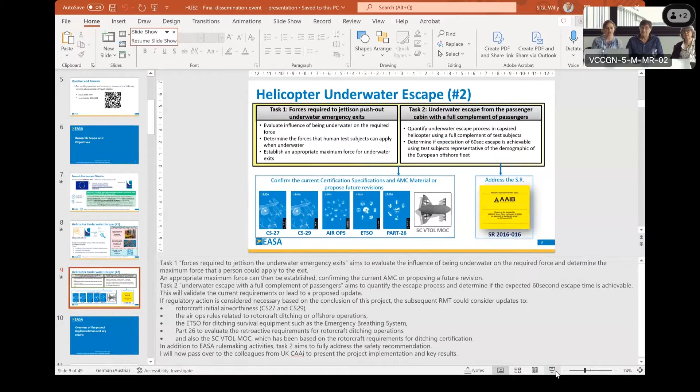The objective of this research was to carry out an initial review into the nature of the research that could be envisaged to answer this safety recommendation. So the first task of this project was to perform an analysis of the currently available information.

The shortfalls in this data were then identified and future research activities proposed to address these shortfalls. The initial research project identified 3 high potential safety benefit future projects.

The first one was an investigation into the forces required to jettison push-out underwater emergency exits. The second one was underwater escape from the cabin with a full complement of passengers. And thirdly, passenger training and fidelity.

Of these 3 potential projects, 2 were selected to be investigated further by this research project, the helicopter underwater escape number 2.

So the first task, forces required to jettison the underwater emergency exits, aims to evaluate the influence of being underwater on the required force and determine the maximum force that a person could apply to the exit. An appropriate maximum force can then be established, confirming the current AMC or proposing a future revision.

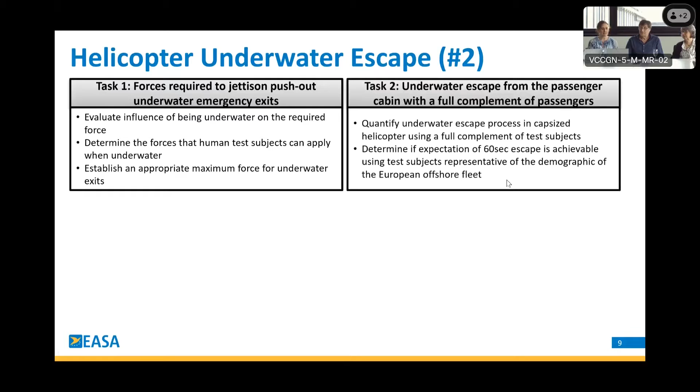Task 2, underwater escape with a full complement of passengers, aims to quantify the escape process and determine if the expected 60-second escape time is achievable. This will validate the current requirements or lead to a proposed update.

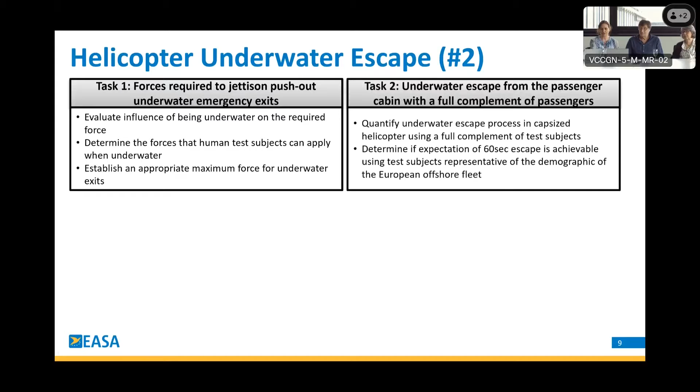If regulatory action is considered necessary based on the conclusions of this project, the subsequent rulemaking task could consider updates to rotorcraft initial airworthiness, so CS27 and CS29, the AirOps rules related to rotorcraft ditching or offshore operations, the ETSO for ditching survival equipment, such as the emergency breathing system, Part 26 to evaluate the retroactive requirements for rotorcraft ditching operations, and also the SC VTOL MOC, which has been based on the rotorcraft requirements for ditching certification.

In addition to the EASA rulemaking activities, Task 2 aims to fully address the safety recommendation.

I'll now pass over to the colleagues from UKCAA International to present the project implementation and key results.

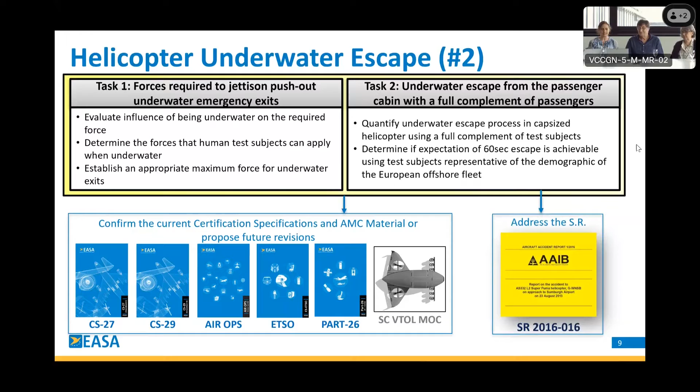Good afternoon, everybody. The trials performed for the project were carried out at the helicopter underwater escape training facilities of Blackpool and The Fylde College at their Fleetwood Nautical Campus.

The trials were run by the staff of the Fleetwood Test House, and the helicopter simulator was operated by the training staff of the Fleetwood Offshore Survival Centre, who also supplied the safety personnel and divers. The environmental training tank in the photo on the left consists of a 4-metre deep pool with an adjustable shallow water platform.

We will now play a short video clip to give you an appreciation of how the simulator operates.

The helicopter underwater escape training simulator, or HUETS, that you can see in the photos is normally configured with 2 large doors at the front of the passenger cabin and 4 underwater emergency exits.

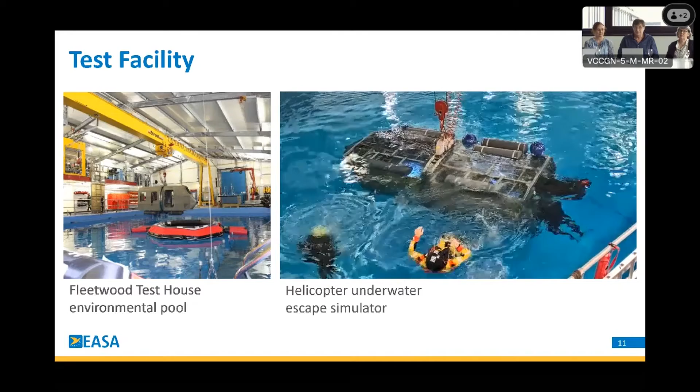The normal seating arrangement is 2 rows of 3 seats arranged in a 2+1 configuration, with a third row of a single seat, plus 2 seats in the front cockpit compartment representing flight crew seats.

The high back seats are fitted with 4-point harnesses and can be moved to accommodate different seating configurations. The right-hand photo shows a 4 abreast configuration used during the trials, with one of the seats in the stroke position.

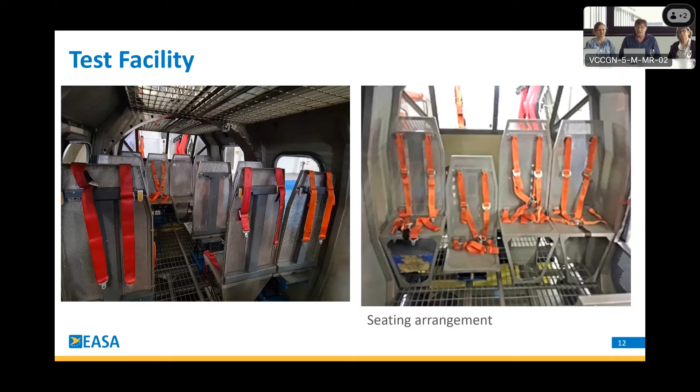The back of the cabin is open to allow access and to permit the HUET instructor and safety divers to observe the test subjects inside the HUETS.

A pool of 18 test subjects was recruited by the Fleetwood Test House, selected to be representative of the offshore workforce. The size categories defined in the new survival equipment standards were used to classify the test subjects, and at least 2 subjects for each of the 9 size categories were selected.

At least 2 subjects had a shoulder width measurement greater than 500 millimetres, which equates to the UK North Sea Extra Broad, or XBR, classification. There were also a range of ages and a mix of males and females.

All test subjects wore a helicopter immersion suit with a thermal liner and a helicopter constant wear life jacket, both similar to the equipment used by members of the UK offshore workforce when flying offshore. The survival equipment was worn over standard clothing, and the life jacket was fitted with an approved Category A compressed air emergency breathing system.

Full risk assessments were undertaken before conducting the trials, and ethical approval was provided by the Blackpool and The Fylde College Ethics Committee, based on the risks identified.

All test subjects were given information on the purpose of the trials, what they would be expected to do, and their right to withdraw at any time.

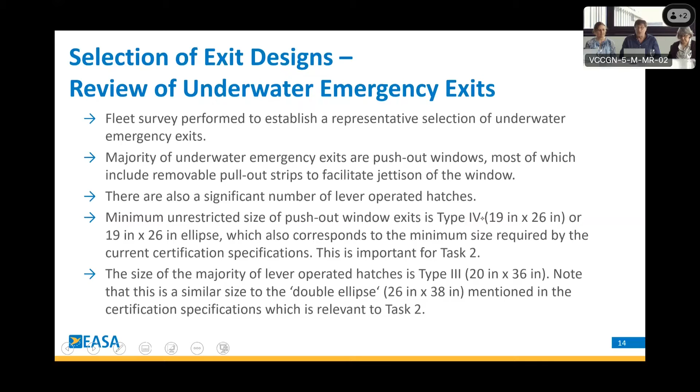The certification specifications also allow the use of an exit large enough to permit the simultaneous escape of 2 passengers side by side, which, in theory, would require an opening of 26 by 38 inches. Advantage was taken of the opportunity to evaluate these exits and also to assess whether the orientation of the exit is important, that is, landscape or portrait.

At 20 by 36 inches, the Type 3 exit is not quite as large as the double ellipse specified in the certification specifications, but it was considered of value to assess whether this standard exit would be large enough to permit the simultaneous escape of 2 passengers.

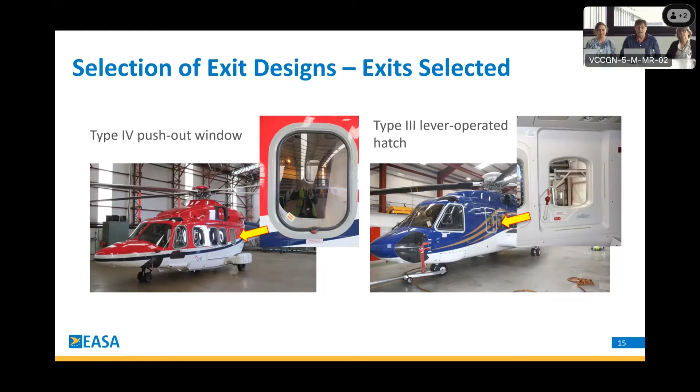The 4 standard exits in the HUET are Type 4 size, and it was only necessary to replace them with new exits fitted with adjustable spring ball detents so that the jettison force could be varied. An example is shown viewed from both inside and outside the HUET in the photos.

A special adapter plate was also manufactured to enable an actual AW189 rear passenger exit to be fitted to the HUET to enable comparison between the simulated exit and a real aircraft exit. This was to confirm that the behaviour of the simulated exit and a real exit secured by ball detents was sufficiently representative of a real exit fitted with a rubber seal.

It's not practical to produce a variable force rubber seal. The comparison was performed by 3 test subjects separate to the main pool of 18 in order to avoid any practice effect on the main trials.

The 3 operating techniques of hand push, hand strike and elbow strike were evaluated for 4 points of force application on the exit. These were the lower corner, halfway along the short side, halfway along the long side, and in the middle of the exit.

The trials were performed with the seat at normal height and then repeated with the seat fully stroked. The force applied was measured using a load cell for the purposes of the comparison. The operating force of the simulated exit was adjusted to match the aircraft exit for a hand push at the lower corner.

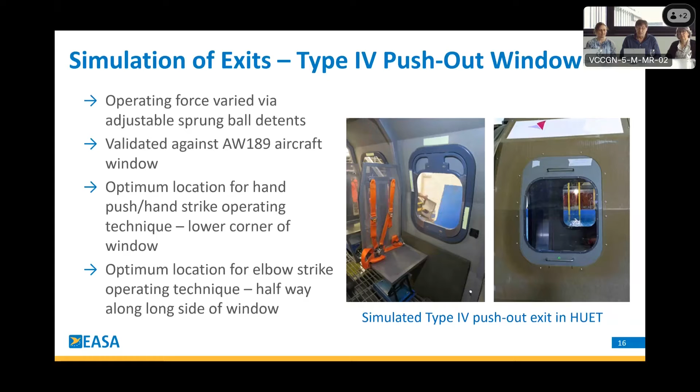The comparison confirmed similar behaviour of the real and simulated exits. In particular, for both exits, the optimum point of application of force for the hand push and hand strike techniques was found to be the lower corner of the exit. For the elbow strike technique, it was the middle of the long side of the exit. The middle of the exit required the largest operating force in both cases.

The simulated Type 3 lever-operated exit was fitted to the port side front door frame using a special adapter plate as shown in the left and middle photos. The operating force was adjusted by varying the torque loading on the lever spindle, which in turn varied the friction and hence the operating force. Comparison with a real aircraft exit was not considered to be necessary.

The starboard door frame was fitted with baffle plates to present a 26 by 38 inch large exit in portrait orientation for use during Task 2. This exit utilised the normal HUET operating lever located at the top of the door.

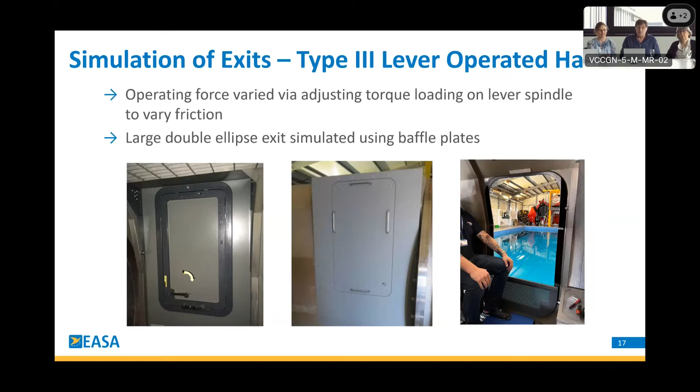And now on to Task 1.

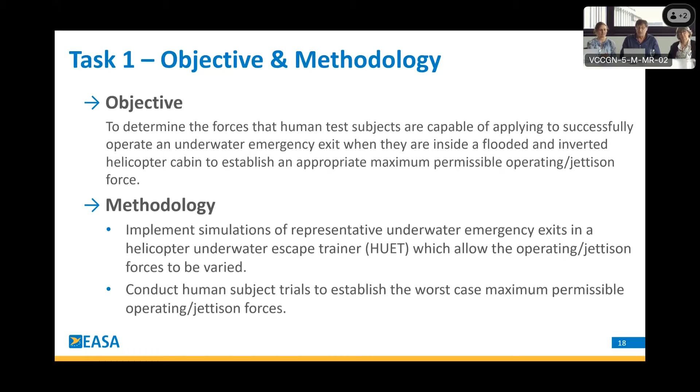As Emily mentioned earlier, the overall aim of Task 1 was to establish the forces that human test subjects are capable of applying to operate underwater emergency exits when they are inside a flooded and inverted helicopter cabin. The data generated by the trials can then be used to establish an appropriate maximum permissible operating force for comparison with the certification specifications. The methodology employed was to implement simulations of representative underwater emergency exits in a HUET in a way that allowed the operating forces to be varied and then perform human subject trials to establish the worst case maximum permissible operating forces.

The testing of the Type 4 push-out window exit commenced with dry trials and employed all 18 test subjects. The maximum operating force for each test subject was determined with the seat in the normal and stroke positions, using the corresponding optimum point of force application previously established for each of the 3 operating techniques.

The wet trials were performed with the seat in the worst case position as determined during the dry trials, which was the stroke position.

All 3 operating techniques were assessed by 9 of the test subjects, 1 from each of the 9 size weight classes. Each technique was performed with both the left and right hand or elbow.

Each wet trial was performed with the underwater escape trainer fully submerged but not inverted. Compressed air EBS was used by the test subjects during these trials, which was deployed prior to submersion.

For each test point, the operation of the exit was undertaken with the test subject in each of 3 starting positions, representing the possible scenarios that might occur in a real underwater escape. These were: seated next to the exit, floating in the cabin with the use of a handhold on the cabin wall next to the exit, and floating in the cabin without a handhold.

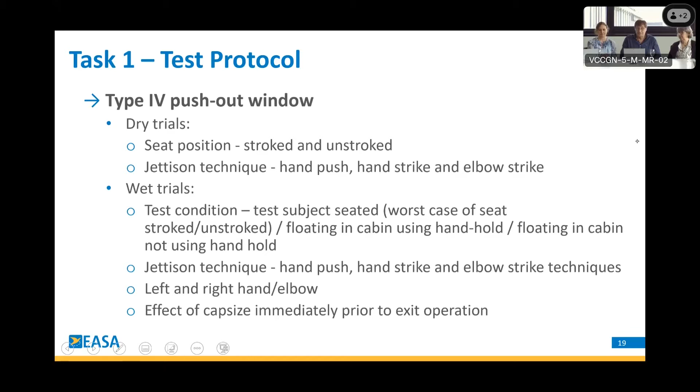As for the Type 4 push-out window, the testing of the Type 3 lever-operated hatch commenced with dry trials and employed the same test protocol, except that there was only one operating technique to evaluate. The wet trials also followed the same protocol, except that the effect of gloves was also evaluated.

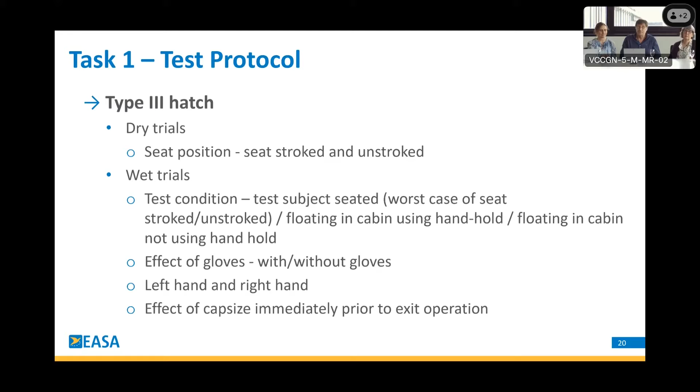There are some general points regarding the test protocol for both exits worth a mention. Firstly, the dry trials were started at the FAA AC operating force of 55 pounds and were reduced in approximately 5 pound increments until all test subjects were able to operate the exit.

If all the test subjects were able to operate the exit at 55 pounds, the operating force was increased instead of reduced.

Secondly, the wet trials were started at the lowest maximum operating force established during the dry trials, in the expectation that exit operation would be more difficult in the wet condition.

Third, during both the dry and wet trials, test subjects that had already successfully operated the exit were not required to repeat the test at lower operating forces. This was simply to save time.

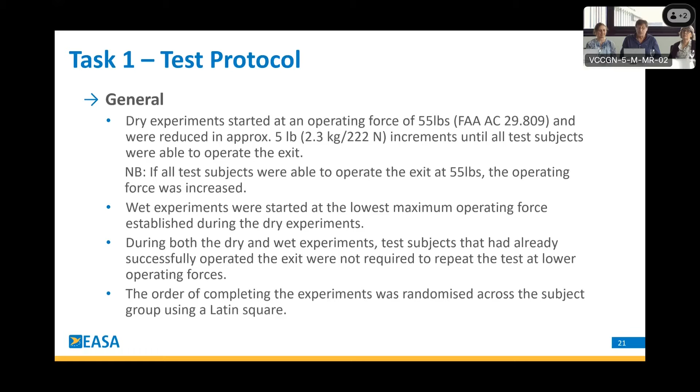And finally, the sequence of completing the trials was randomised across the subject group using a Latin square to avoid any order effects.

As you can imagine, with 18 test subjects and a number of permutations of variables such as seat position, left hand, right hand, and jettison technique, there are hundreds of results. But the results of most interest are the worst case or lowest forces measured, as it is these that represent the limit of what occupants can be expected to cope with in an emergency.

In terms of the overall results then, for the Type 4 push-out window, the worst case was found to be under wet conditions, seated with the seat in the stroked position and with the exit to the right of the test subject. For the Type 3 lever-operated hatch, the worst cases were found to be under wet conditions in the two starting positions of, firstly, seated with the seat in the stroke position and with the exit to the left, and secondly, free floating in the cabin.

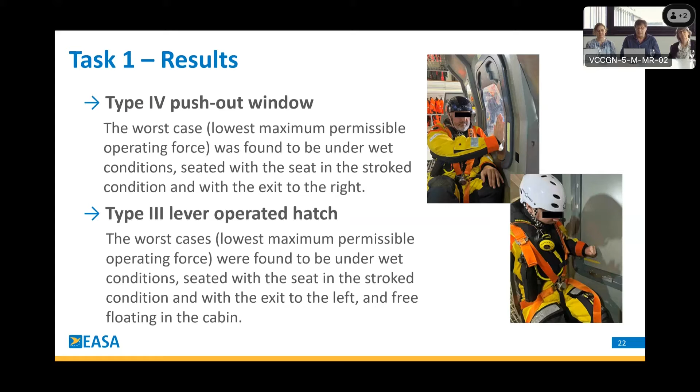Note that all of these forces, except for the elbow strike on the push-out window, are lower than the FAA AC figure of 55 pounds.

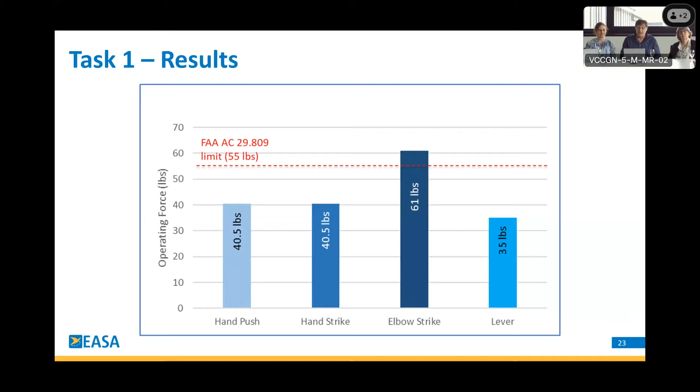Some general findings of interest were that gloves didn't have any significant effect. They were only evaluated for the lever-operated hatch, but this was because they were not expected to make any difference when operating the push-out window.

Secondly, handholds were very useful for operating the push-out window when free-floating in the cabin, but made no difference with the lever-operated hatch. Third, the addition of the capsize didn't have any effect on the operation of either exit.

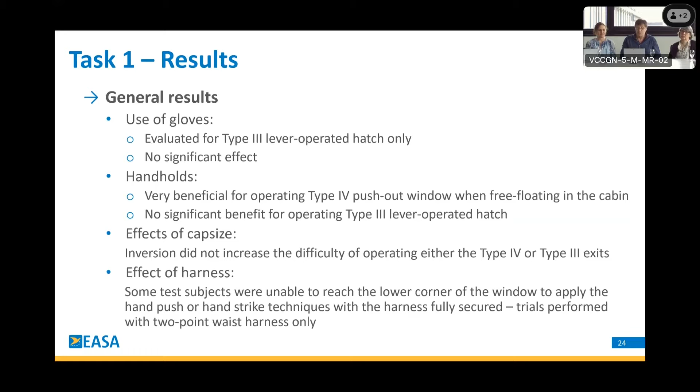Finally, some test subjects couldn't reach the lower corner of the window with the 4-point harness fully secured. This is important as it is standard practice to open the exit before releasing the seat harness. For the purposes of the trial, a 2-point waist harness only was worn by all test subjects.

Turning now to the application of the results for the push-out windows, the lowest maximum permissible operating force of 40.5 pounds using the hand push and hand strike techniques was lower than the limit defined in the FAA AC, currently applied by CS 27/29. However, the lowest maximum permissible operating force for the elbow strike technique of 61 pounds was greater than the FAA AC load limit. So either the force limits in CS 27/29 should be lowered for certification testing, or if the current force limits are retained, passengers should be briefed to use the elbow strike technique to operate the exit.

Because of the dynamic loading situation, the operating forces measured for the hand and elbow strike techniques were highly variable. The static loading of the steady hand push technique was more repeatable, produced more consistent results, and should therefore be used for certification testing.

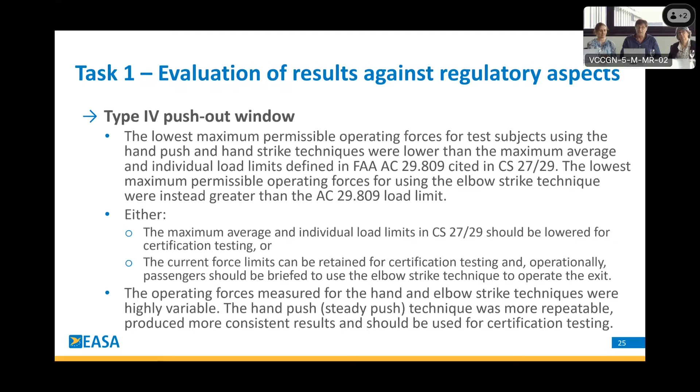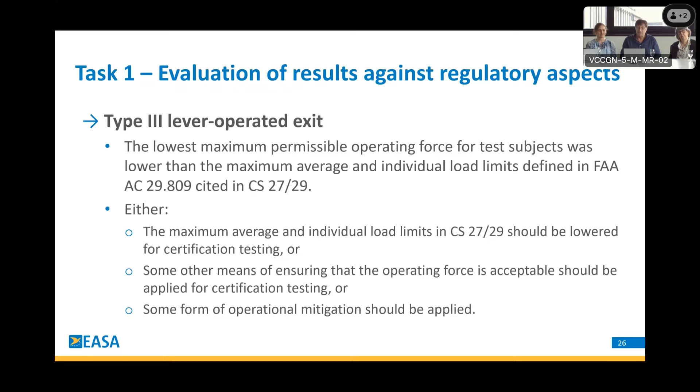Moving on to the lever-operated hatch. At 35 pounds, the lowest maximum permissible operating force was lower than the FAA AC limit. So once again, either the force limits in CS 27/29 should be lowered for certification testing, or some other means of ensuring the operating force is acceptable should be applied, or if the current force limits are retained, some form of operational mitigation should be applied.

And finally, there were some general regulatory points. Firstly, on handholds. These were found to be very useful when operating the push-out windows when the test subject was not secured by a harness. Handholds should be located so that they can be reached by passengers free-floating underwater in the capsized helicopter cabin, to help overcome the buoyancy of the immersion suit and react against to operate the exit.

Secondly, referring back a couple of slides, the relative positions of the seats and the exits need to be arranged such that the occupant can reach and operate the exit with the seat harness fully secured. I will now hand over to Sue to take you through task 2.

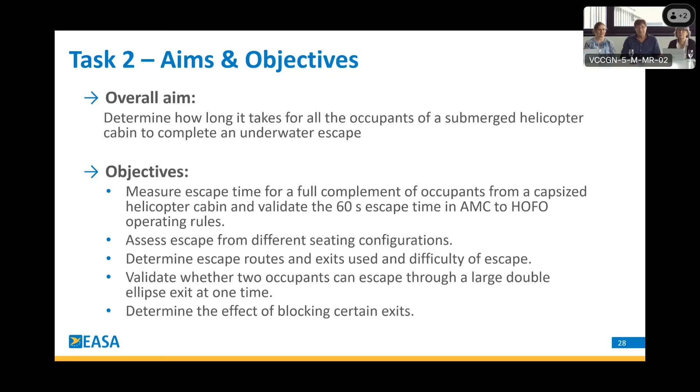So the first objective to be addressed was validation of the large double ellipse exits. These trials were conducted to determine whether 2 occupants with shoulder widths greater than 500 millimetres could escape through an exit encompassing 2 ellipses of 0.48 by 0.66 metres, with overall dimensions of 0.96 metres by 0.66 metres, as described in AMC1 to the certification specification CS29.

Trials were undertaken with 2 pairs of large test subjects, with shoulder widths greater than 500 millimetres. We assessed attempts at simultaneous escape with the exit in both landscape and portrait orientations, using a test rig fitted to the back of the helicopter simulator for the landscape option, shown in the photo on the left of the screen.

On the right, the top 2 photos show 1 pair of test subjects escaping through the landscape version of the exit. Initially, the test subjects are facing each other, but while starting the escape together, the subject on the right pushed through a little more quickly, and also turned face down as he egressed through the exit. The second subject was just a little behind, but this escape was considered to be simultaneous.

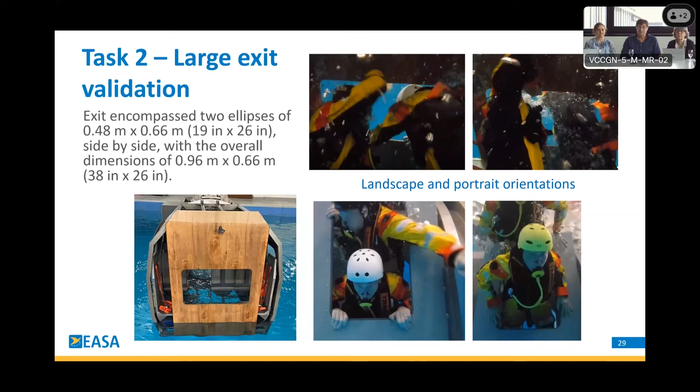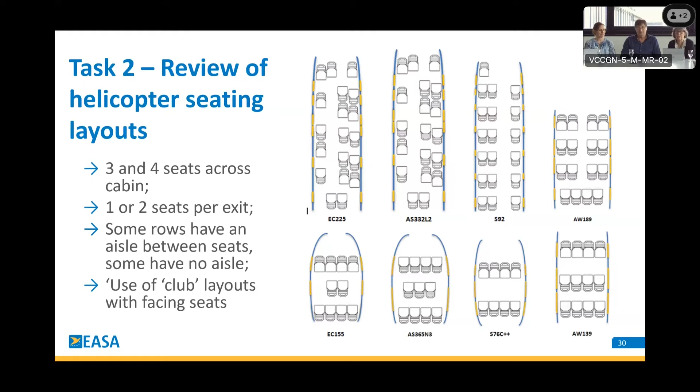Based on this review, we undertook a series of seating arrangement trials to determine the time taken to escape from these different seating configurations. The seats were aligned with the exits, and the exits themselves were either type 3 or type 4, depending upon the configuration assessed. These trials were done with the helicopter inverted.

So the first 3 of these trials looked at escape from a single row of seats, both without the use of a handhold and with the use of a handhold. I'll initially focus on the escape times without use of a handhold.

It took a mean time of 25 seconds for 2 subjects to escape from one type 4 exit. We then added a 3rd subject sat across the aisle, with all 3 using the same type 4 exit, and this took an additional 10 seconds on average for the 3rd person to escape.

When we had 4 subjects escaping from 2 type 4 exits, the mean time for all to escape was 33 seconds, which is somewhat longer than the equivalent 2 subjects through one exit.

Only very small differences were seen when we looked at the total times to escape when a handhold was present. When we compared the times for each test subject to escape with and without a handhold, the only significant difference was seen in the 3rd single row exercise, when escape was quicker with a handhold.

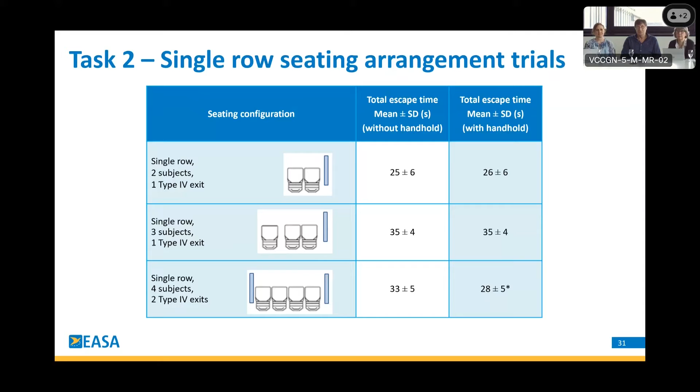Moving on to the double row trials, we first had a club arrangement of 2 subjects facing 2 subjects, escaping through a single large double ellipse exit. This took 39 seconds, which is longer than the 25 seconds for 2 subjects to escape through the smaller type 4 exit.

It should be noted that there was no handhold on this exit. Also, as this was a push-out exit, there was a pull-out strip simulated, which again, because of the size, took longer to remove than the ones on the smaller type 4 exits. So, while the large exit potentially allowed the simultaneous escape of 2 subjects at a time, in these trials they were a bit slow getting out, and the time was not equivalent to 2 subjects escaping through a type 4.

I should also say that our test subjects were on the whole very calm and, benefiting from the use of the EBS, appeared to take it in turn to escape without panic. We wouldn't expect that in a real emergency accident.

If I can jump to the 3rd row of this chart now, a similar escape time was seen for 8 subjects escaping through 2 type 3 exits, one of which being the double ellipse exit.

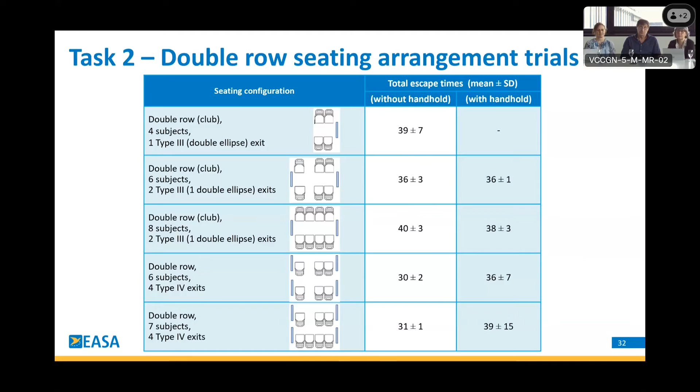These 4 subjects were served by 2 type 3 exits, E1 on the port side being the lever-operated hatch, and E4 on the starboard side being the large double ellipse exit. Behind them were 2 rows of 3 subjects served by 4 type 4 exits.

As we were only able to seat 13 subjects within our particular helicopter simulator, we had a further 4 subjects in the water at the back, making a total of 17 subjects. These 4 entered the cabin from the rear when submersion or capsize was complete, and were allowed to use any exit they chose. This was thought to be equivalent to having an extra row of seats at the back of the cabin, with those back exits blocked.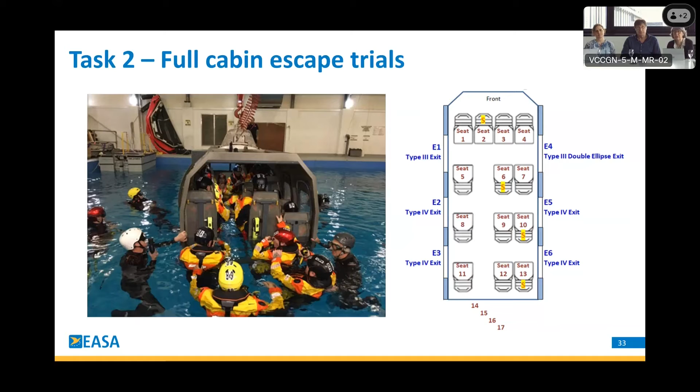So the first exercise was a submersion. On the right, you can see a diagram of the escape routes taken and the order in which the subjects escaped. The first person out of each exit is represented by the longest green arrow, and the last subject to escape from each exit is shown by the shortest arrow in each case.

At the front of the cabin, 5 subjects escaped through the Type 3 lever-operated exit, E1, and only 2 subjects escaped through the double ellipse exit, E4, which took a little longer to jettison. In this exercise, the subjects in the 2 back rows all escaped in order through their nearest exit.

The 4 subjects swimming in from the rear each selected a different exit. The first subject into the cabin, 6A, was the 3rd subject to escape through exit E5. The second in, subject 4B, was the 2nd to escape through exit E3. The 3rd in, 9B, was the 2nd to escape through exit E2.

And the 4th in, 6B, was the 3rd subject to escape through E6.

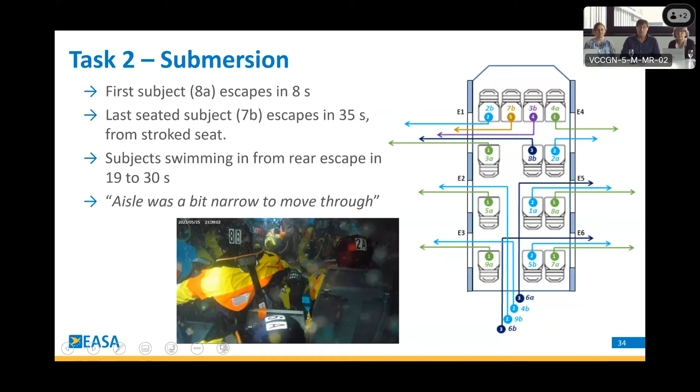Next, we undertook a capsize exercise, and I'm first going to show you some video from above and inside the cabin, with the 2 cameras inside the cabin showing the cabin in the inverted state. I'm going to go on later to show you individual shots from inside the cabin to get a bit more detail.

That's the capsize just completed.

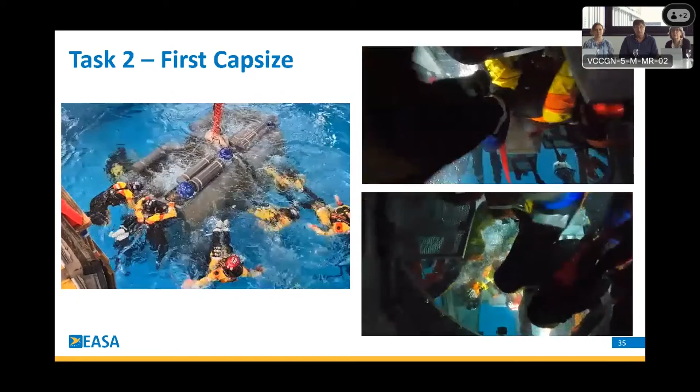You can see the subjects from the rear of the cabin coming in after the others have escaped. In this case, the buoyancy from their suits is pulling them up actually towards the floor of the cabin, which is uppermost.

I'd now like to play you the 2 videos from inside the cabin, but in this case in the non-inverted format, which I think is a bit easier to see what's happening. But remember now that buoyancy is pulling subjects to the floor of the cabin, at the bottom of the view, rather than the other way around.

So first of all, the forward-facing camera.

Capsize ends when we stop seeing a lot of bubbles. We found that the Type 3 exit on the left was jettisoned ahead of the double ellipse exit on the right.

Now you can see one of the subjects coming in from the rear of the cabin. He kicks 7B as he turns to go out through the Type 3 exit.

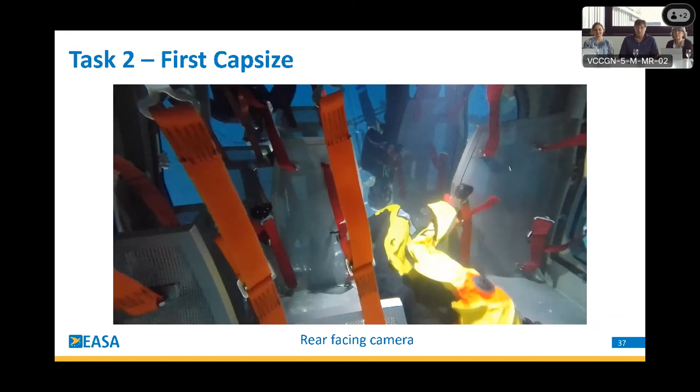That's the last one out.

So in this first capsize, 6 subjects escaped through exit 1, the type 3 on the port side, and 3 through the double ellipse exit on the starboard side. Overall, the first person out was 2B, who was sat in the rear single seat on the port side. He took 19 seconds to escape. The last person out was subject 6A, who was the last subject entering the cabin from the rear, and he escaped from exit E2 in 65 seconds.

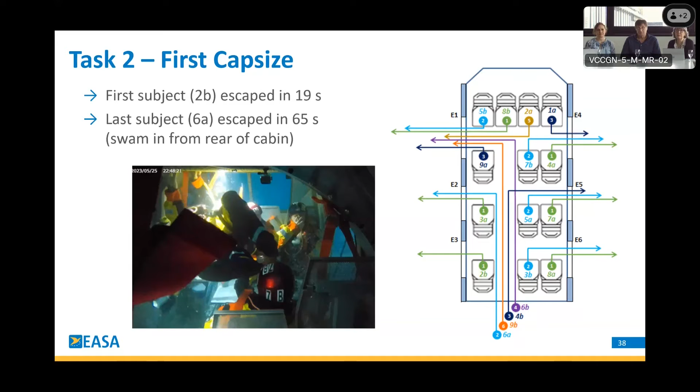In our final exercise, we did a second capsize trial, but in this case we blocked the forward port side type 3 exit, E1. This resulted in 8 subjects escaping through the large double ellipse exit and 7 subjects escaping through the type 4 exits. The first subject out in this case was 8B, sat in the rear starboard seat, who escaped in 23 seconds. The last subject to escape was 9B, who again was someone coming in from the rear.

So he escaped in 70 seconds. This exercise with a blocked exit thus took 5 seconds longer than the previous capsize exercise, where we effectively simulated 2 blocked exits. In this case, we simulated 3 blocked exits.

When considering the overall escape times following capsize of 65 and 70 seconds, a number of factors should be considered. First, the exercises were undertaken in daylight conditions, both to enable filming and to enable us to work out escape routes, but also to improve safety.

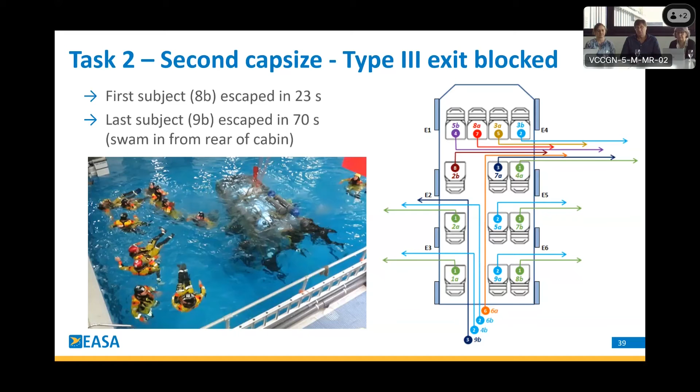To finish, I'd like to consider how the results impact on current regulatory issues. The results of Task 2 support the material provided in the AMC2 SPA-HOFO, which states that it should be possible for a full complement of helicopter passengers to escape from the inverted helicopter within the underwater survival time of 60 seconds. This conclusion is based on the best case when environmental conditions are good and nothing goes wrong.

The additional blocked exit did in our trials increase escape time, but in the various exercises, escape times were also increased by problems releasing an exit, pulling out a strip, or releasing a seat harness. So there's a lot of variables that can increase the overall escape time.

Thanks to the current design specifications, we did not observe anyone having problems escaping through an exit because it was too small. We found that an exit which provides an unobstructed area that encompasses 2 ellipses is large enough to permit the simultaneous egress of 2 broad-shouldered passengers, supporting the material included in the helicopter offshore operating rules.

Based on our observations with the double ellipse exit, we have recommended that the term side by side should not be used in the regulations when referring to the double ellipse exit. The term appears to be ambiguous, and the important factor is that the simultaneous escape of passengers is possible.

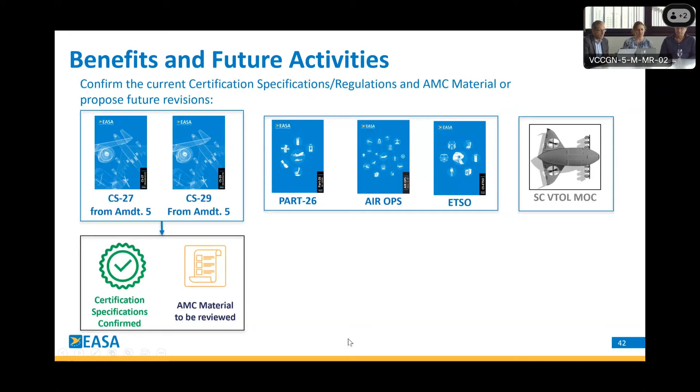Regarding rotorcraft initial airworthiness, the research project has largely confirmed the related ditching and occupant survivability requirements that were introduced in the Amendment 5 revision. This is a very positive result. However, there are a few aspects of the AMC material to be reviewed, such as markings on the handholds and appropriate maximum forces for lever-type mechanisms.

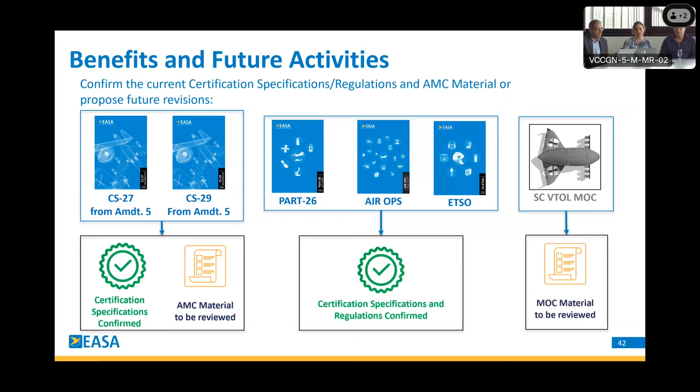The research has also generally confirmed the Part 26, AirOps and ETSO requirements, and this is also a very positive result. Regarding SC VTOL, the ditching operation MOC should be reviewed for overwater operations regarding handhold markings, emergency exit opening mechanisms, and also potentially the aisle width requirement if the aircraft could be fully submerged.

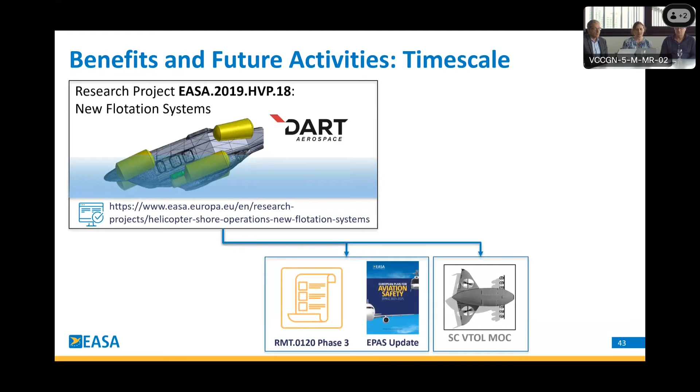Regarding the timescales, the recently completed new flotation system EASA research carried out by Dart Aerospace has already resulted in the launch of Phase 3 of the Rulemaking Task 120 and an update to the EPAS. This rulemaking activity is currently ongoing, with the aim of publishing an NPA for public consultation regarding initial airworthiness in Q1 2025. And the DART new flotation system research also led to a review of the SC VTOL MOC material for ditching certification.

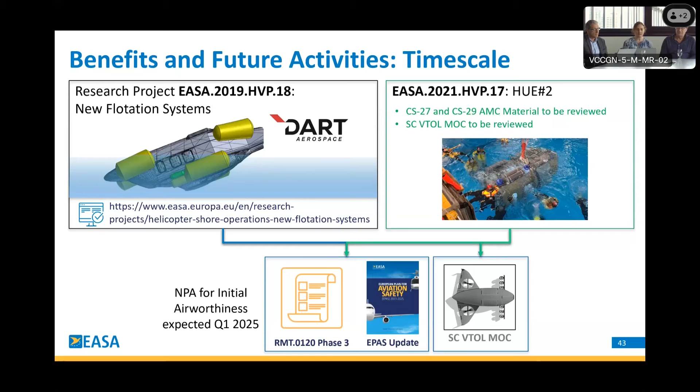As this helicopter underwater research project addresses the same overall topic of occupant survivability in the event of a ditching or survivable water impact, the review of the initial airworthiness AMC material for rotorcraft will be included in the already active Rulemaking Task 120 Phase 3. Therefore, any update to the AMC material considered necessary can be included in the same NPA. Alternatively, we will consider any update to the AMC in the next regular update of CS 27 and 29.

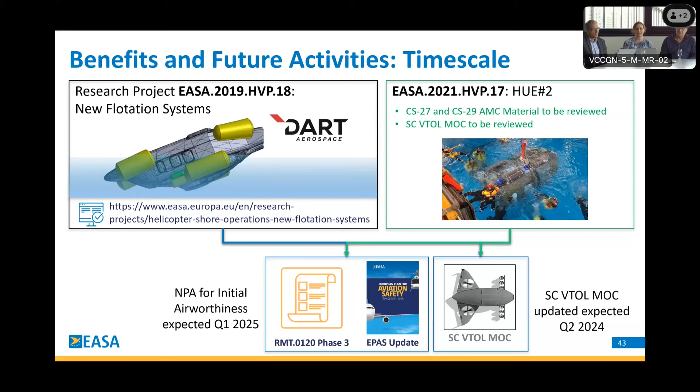And likewise, the SC VTOL review will be carried out considering the conclusions and recommendations of both research projects together. This MOC is expected to be updated in Q2 of this year.

To summarise, the research project has fully addressed the safety recommendation from the UK accident investigation of the Sumburgh accident in August 2013. The current certification specifications, CS27 and CS29 and CS-ETSO, have been confirmed, and this again is a very positive result. In addition, the rulemaking ditching, AirOps and Part 26 regulations do not require further rulemaking activity related to underwater escape.

CS27, CS29 AMC material will be reviewed. This rulemaking activity will be included in the already activated rulemaking task Phase 3, with a target NPA publication in the first quarter of next year for public consultation. And finally, the SC VTOL MOC will be updated according to the research recommendations as appropriate.

So thank you very much. I will now pass back to Willie.

Thank you, Emily. Great results, and actually also a good outlook on how we can use the results, and that the results confirm a number of our current requirements.